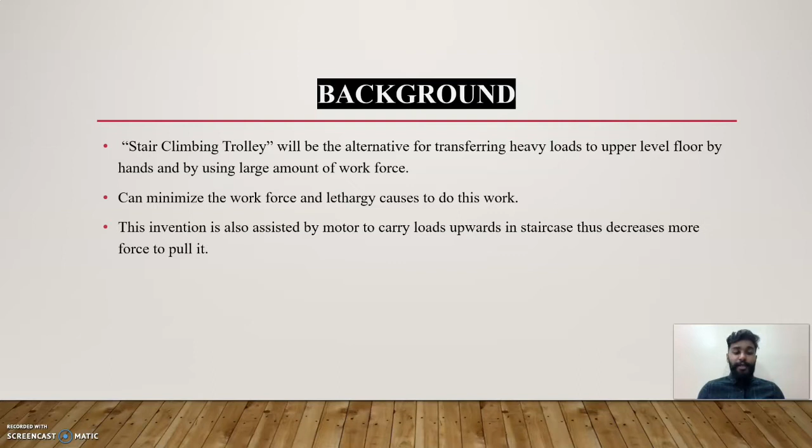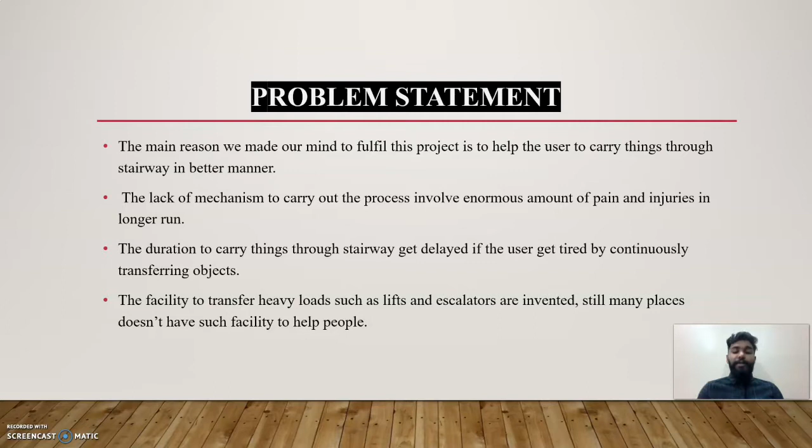And the problem statement. First one is the main reason we made our mind to fulfill this project is to help the user to carry things through stairway in better manner. And the second one is the lack of mechanism to carry out the process involve enormous amount of pain and injuries in longer run. The third one is the duration to carry things through stairway get delayed if the user get tired by continuously transferring objects. And the last one is the facility to transfer heavy loads such as lifts and escalators are invented. Still, many places doesn't have such facility to help people.

Okay, the next slide is objective and scope of the project. First I talk about the objective. First one is to design the stair climbing trolley. The second one is to develop the body of stair climbing trolley, and the third one is to develop the mechanical drive system. The fourth one is to reduce the manual efforts of climbing stairs with loads. The last one is to test the performance of the stair climbing trolley.

Moving on to the scope, first one is to analyze the design to improve the efficiency. Second one is to identify the material used for stair climbing trolley. The third one is to analyze the tri-star wheel, and the last one is to evaluate the performance of stair climbing trolley.

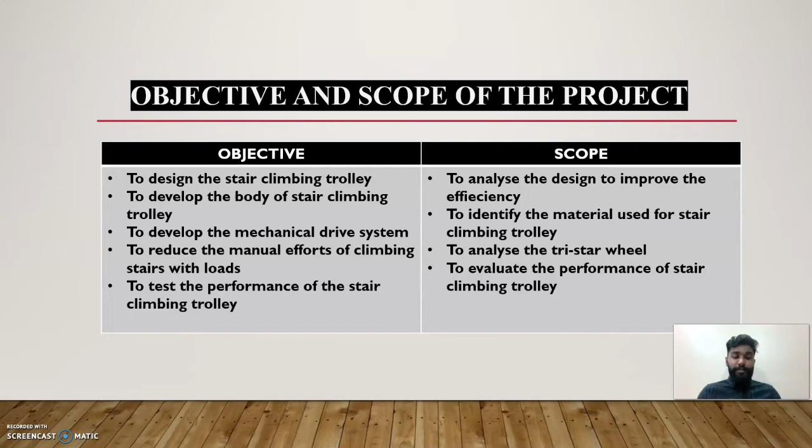This is my last slide, the literature review. First, lifting objects, loads to store or move to above the ground level is not an easy job, where there is no lifting facility such as conveyor, elevator. In addition to this, most of the buildings doesn't have elevators or escalators. To overcome this problem, human labors are frequently used. Nowadays, labor is becoming costly and time consuming. This problem can be solved if a mechanism that aid to move loads through stairway get invented.

The second one is the design and fabricates a new product trolley has multifunction. In addition to this, project focuses on the maximum ergonomically beneficial to human being. And the third one is several designs were conceived that would allow a non-industrial trolley to travel over stairs, curbs, or uneven terrains while putting a minimal strain on the user. And to produce a successful product, the other design options must be examined more closely.

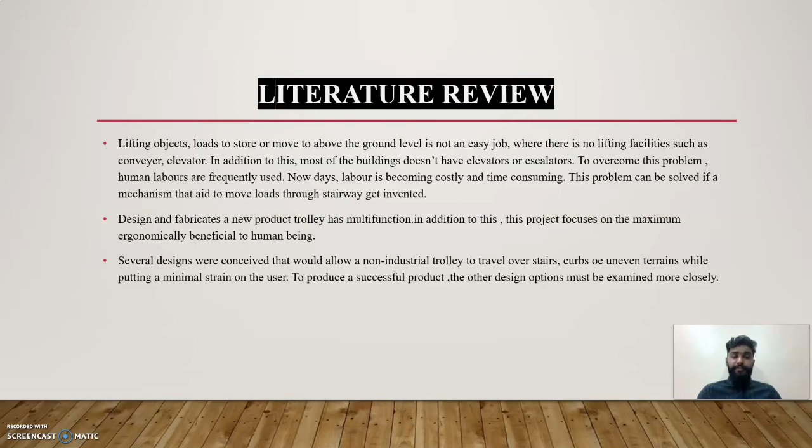So today I'm going to present about methodology of our project. This is our project design of machine, which is staircase climbing trolley. We use AutoCAD to create this design.

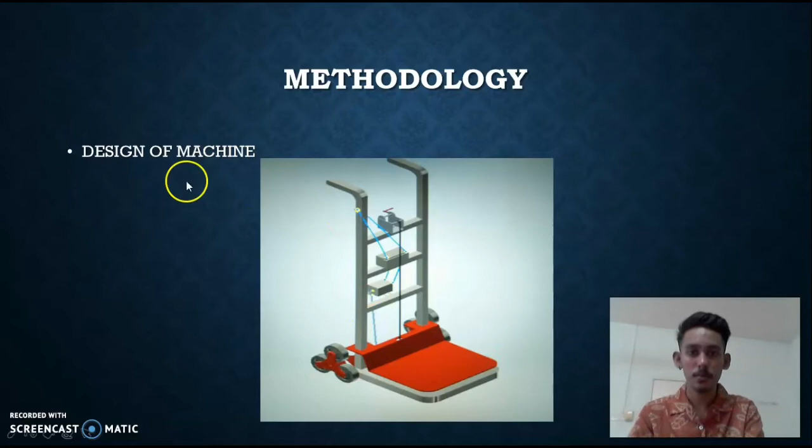Next is our project procedure. Firstly, we welded all the steel that is needed to make a frame. Then the tri-wheel is fixed on both sides in between with a steel bar for the base part to make it move. It is then attached to the base of the frame.

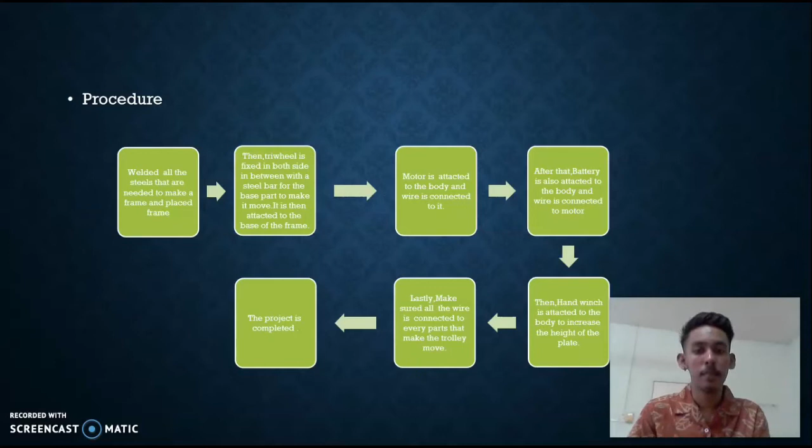And then the motor is attached to the body and wire is connected to it to make the motor work properly. After that, the battery is also attached to the body and wire is connected to the motor. Then the hand winch is attached to the body to increase the height of the plate, which is attached to the base of the frame. Lastly, we make sure all the wire is connected to every part that makes the trolley move. And then the project is completed.

This is our project cost, which is not more than 500. The cost of the battery is 45 ringgit and the cost of the motor is 87 ringgit. The tri-wheels are 19 ringgit each, and two of them equal 38 ringgit. The frame didn't cost us anything because we used recycled items to make the frame.

And then the gear chain is about 35 ringgit, and then the hand winch is about 80 ringgit, and the gears are 15 ringgit each. We took two of them, which equals 30 ringgit.

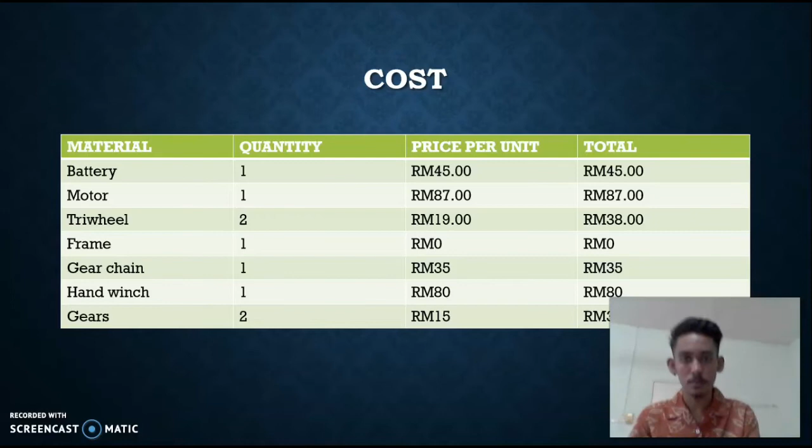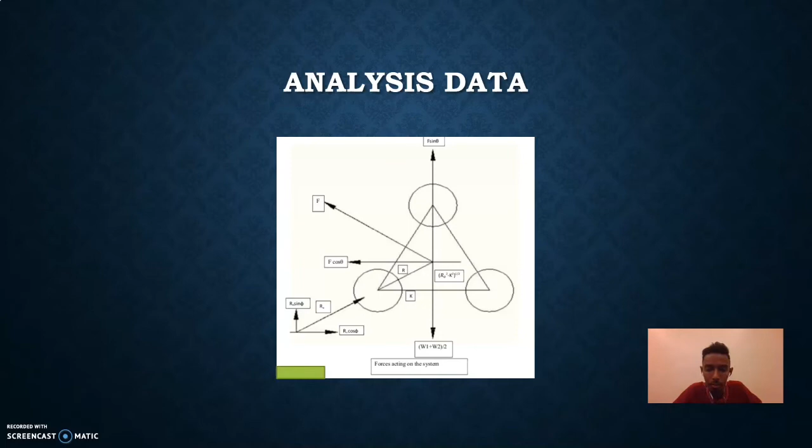So today I will continue my presentation about analysis data. As you all can see over here, these are the diagrams for our force analysis data. And these are the force analysis for our stair climbing trolley project. So I'll explain the symbols that I placed on the diagram. W1 is the weight of the object carried, W2 is the weight of the trolley, RE is the reaction force on one side, F is the force applied, RO is the distance of centroid from center of wheel, and K is the distance between center of wheel and line of action of weight.

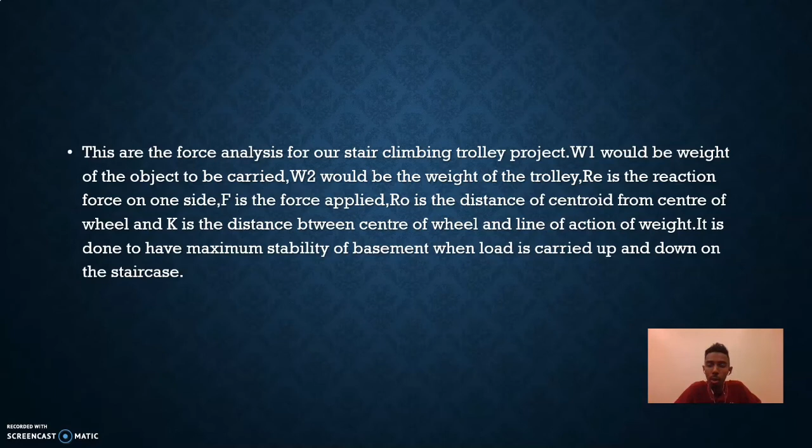We have done these types of upgrades in this project so that we have the maximum stability of the base when load is carried up and down the staircase. Then I will continue with the discussion. After some fabrication, we found a few limitations like large noise production and stability while moving the trolley up and down the staircase. This has been the main thing for this project.

Therefore, the wheel frame is adjusted such that the line passing through the midpoint of the trolley wheel should pass through the midpoint of the step. The modified wheel model has been shown below.

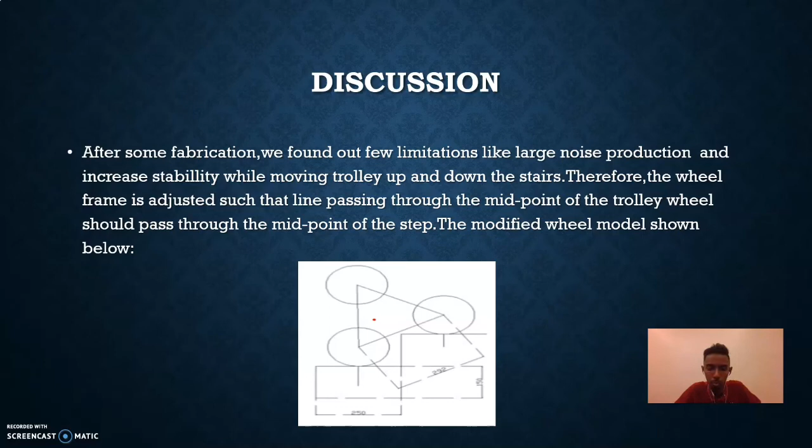And the conclusion: in this work, design and development of a stair climbing trolley was carried out. It comprises the following major components, that is battery, motor, winch, frame, gear chain, and triwheel. Some design parameters such as gear force, shaft diameter, load, torque, and velocity are calculated.